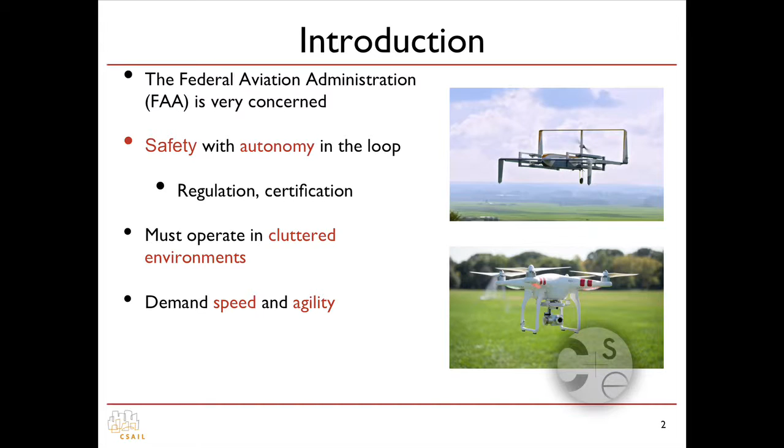So there are a number of factors that exacerbate this challenge. So the first is that we expect these systems to operate in very cluttered environments. So for example, in urban environments or even close to human beings. We also demand speed and agility on behalf of these machines. So there's no point having a drone delivery program if it takes more than a couple of hours for the system to get to your doorstep. And finally, these systems must also be able to deal with unexpected events in the environment. So things like wind gusts, for example, or unexpected obstacles that show up in front of the robot.

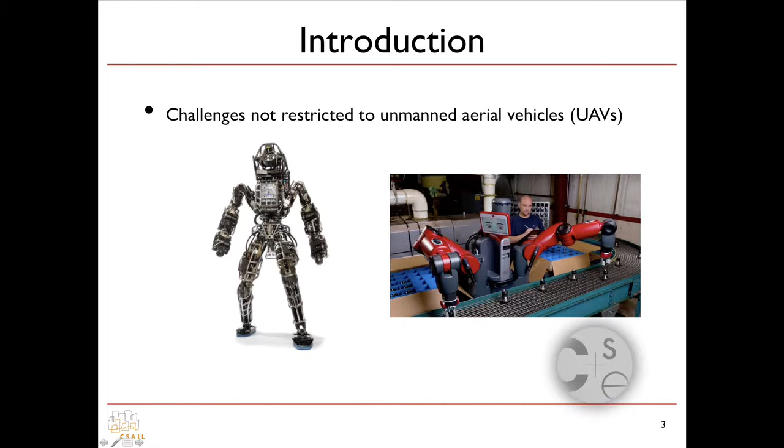So it's worth pointing out that these challenges are not restricted just to UAVs. So we face many of the same challenges in a whole range of other robotic applications. So for example, humanoid robots doing search and rescue missions, or factory robots working close to human beings. So these systems must also be able to operate safely while being fast and agile and responding to unexpected events in their environment. So from a theoretical perspective, these applications pose a number of fundamental challenges.

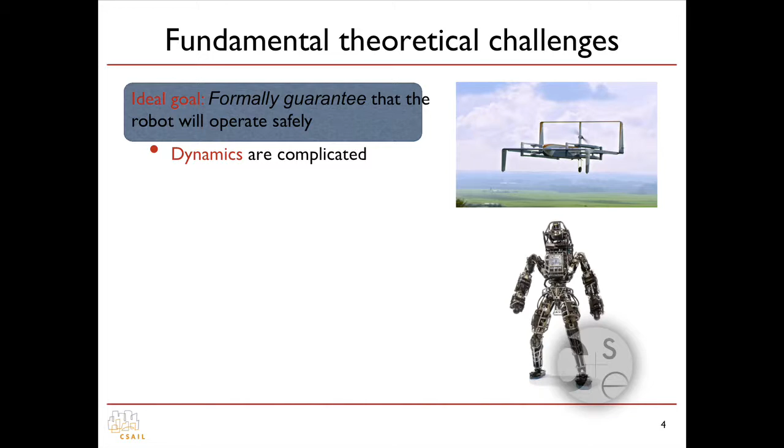So what we'd ideally like to be able to do is formally guarantee safety, so formally guarantee that the robot will operate safely. So for a UAV, this essentially means not crashing into obstacles and not falling out of the sky. But there are a number of technical factors that make this goal extremely challenging. So the first is that the dynamics of these systems can be extremely complicated. So for example, we might have high-dimensional state spaces that we might need to reason about, and also potentially nonlinear effects, such as aerodynamic effects.

There's also significant uncertainty in the dynamics. So for example, things like wind gusts or an uncertain payload that the robot might be carrying. And finally, there's also significant uncertainty in the geometry of the environment. So typically for these applications, we don't know where obstacles will be and what they'll look like until the robot actually starts operating in that environment.

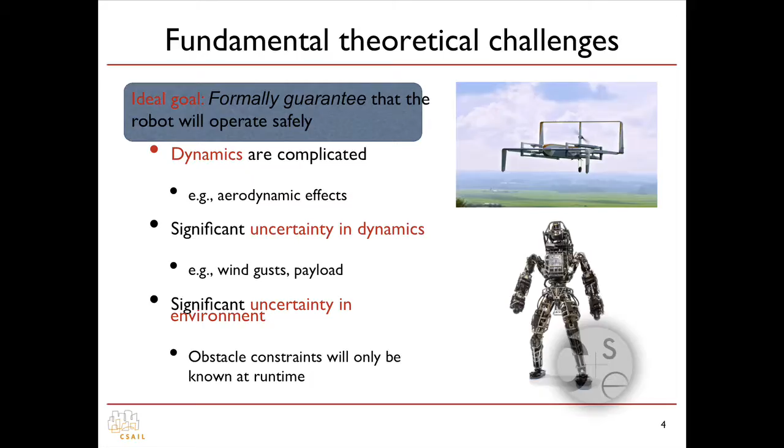So what I'll present today, I believe, is a partial solution to this ideal goal of guaranteeing safe operation of the robot, despite having these technical challenges. So just to keep the discussion relatively constrained, for most of the talk, I'll focus on the problem of high-speed UAV flight through really cluttered environments.

But I want to point out that the approach that I'll present is significantly more general and not tied to the specifics of UAV applications. So I'll present algorithms for designing feedback controllers that come with associated guarantees on their safety. And I'll then discuss how we can take these feedback controllers and certificates of safety and use them for safe, real-time planning in environments that the robot hasn't seen before.

And along the way, I'll present a number of hardware experiments on a small fixed-wing airplane flying at high speed through very cluttered environments. OK, so here's the general problem we're trying to tackle. What we want to do is be able to guarantee that the UAV will fly through some environment without collisions, given no prior map of where the obstacles in the environment are.

So I'll make a number of assumptions. First, I'll assume that we have a reasonably accurate model of the dynamics of the system. It doesn't have to be perfect, but I'll assume that you have a model of this uncertainty in some parametric form, and that this uncertainty has a bounded effect on the system. And finally, I'll assume that the robot is equipped with a number of sensors which report where obstacles in the environment are, but in some finite horizon in front of the robot.

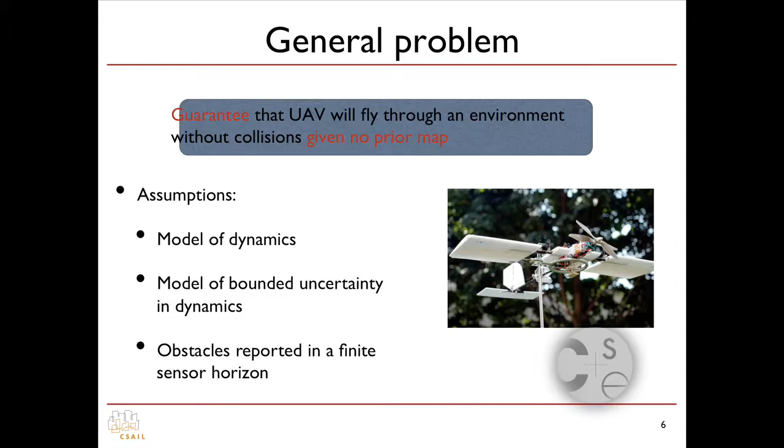OK, so instead of discussing the solution to this completely general problem, for most of the talk today, I'll focus on what I consider to be the most important subproblem, which is how do you plan a single maneuver such that the UAV is guaranteed to be collision-free when that maneuver is executed.

So here's the picture I want you to have in your head. Suppose the robot is flying along, and suddenly its sensors report a number of obstacles in front of the robot. The question is, how do you plan a single maneuver such that you can guarantee that when that maneuver is executed, the robot will remain collision-free?

So let me give you some intuition for some of the technical challenges involved with this task. First, there's a combinatorial decision that needs to be made. Should the robot go left around the obstacles? Should it go in between the obstacles? So there's a discrete number of possibilities that it needs to choose from.

We also need to take into account likely tracking error. For instance, the current state of the robot might not be perfectly aligned with the plan that the robot made. And more significantly, we also need to take into account the effect of uncertainty or disturbances on the system. For example, there might be a large wind gust that blows the airplane off its planned trajectory and makes it crash into an obstacle.

So what we really need to do is reason about the funnel of possible outcomes that the robot might be driven to, depending on what value the disturbance takes. Different maneuvers also have different susceptibility to disturbances. For example, it might be a lot easier to fly straight. In particular, the set of possible outcomes that the robot might be driven to might be a lot narrower, as opposed to doing a really aggressive turn to the right, where you're more exposed to a large wind gust that can blow you into some large set of possible outcomes.

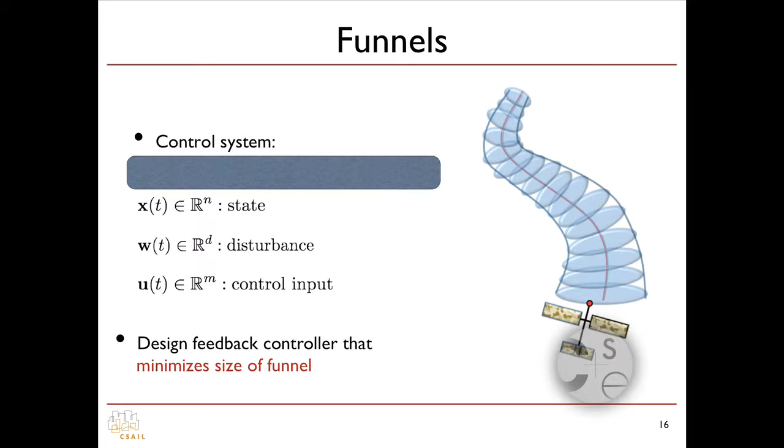Because if the funnel doesn't intersect the obstacles and the robot is guaranteed to remain within the funnel, then the robot won't collide with any of the obstacles. OK, so that's the high-level approach. Let me now dig into some of the details of the approach. So in the offline phase, what we'd ideally like to be able to do is, given a control system of this form, we'd like to design a feedback controller that minimizes the size of the funnel going forwards in time. So I'll fix the set of initial conditions, and I'll try to design a feedback controller that minimizes the effect that the disturbances have on the system.

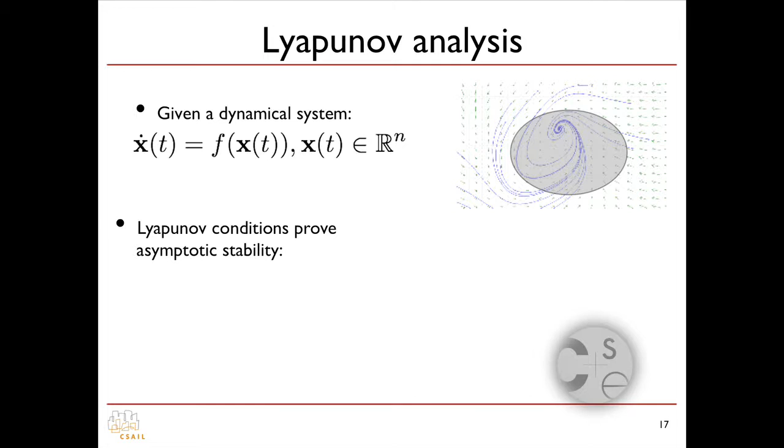So one way to prove this is to find a Lyapunov function. So a function V for which the gray set that I've drawn here is a sub-level set of this function. So sub-level set just means all the states x for which the value of the function is less than or equal to rho. So rho is 100 in this picture that I've drawn here. And let's say we can further show that the value of this function is positive definite on the set, and the time derivative is negative definite.

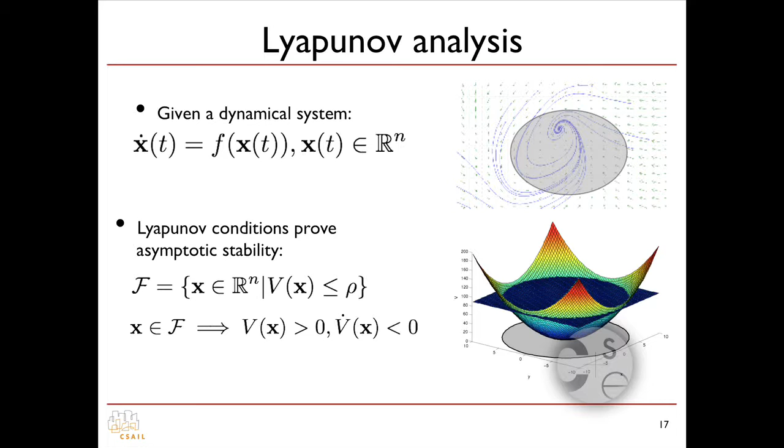So in other words, along trajectories of your system, you're going downhill on this function. So intuitively, it should be clear that if your function looks sort of like a bowl and you're going downhill on this function, then you'll asymptotically approach the origin. So you can use a similar kind of idea for computing funnels.

So we'll represent the funnel as a sub-level set of this time-varying function v. So in this case, what we're interested in is not asymptotic stability. What we want to show is invariance. So in other words, we want to show that if the state of the robot starts off in this initial condition set, so the inlet of the funnel, then when you execute this maneuver, you'll remain within this time-varying sub-level set.

So you can write down a slightly different Lyapunov condition in this case, which says that when v equals rho, so in other words, when you're on the boundary of the funnel, v dot is less than rho dot. So essentially, the vector field is pointing inwards when you're on the boundary of the funnel. So if you start off in the funnel, you never leave it.

So in the kinds of applications we're interested in, it's really important to take into account the effect of disturbances or uncertainty on the system. So it turns out you can do a similar kind of analysis for cases where you have bounded uncertainty. So what we'd like to show is this invariance condition for bounded uncertainty. So we want to show that when you start off in this initial condition set and you execute this maneuver, no matter what the disturbance is in some set of disturbances that you care about, you'll still remain within this funnel.

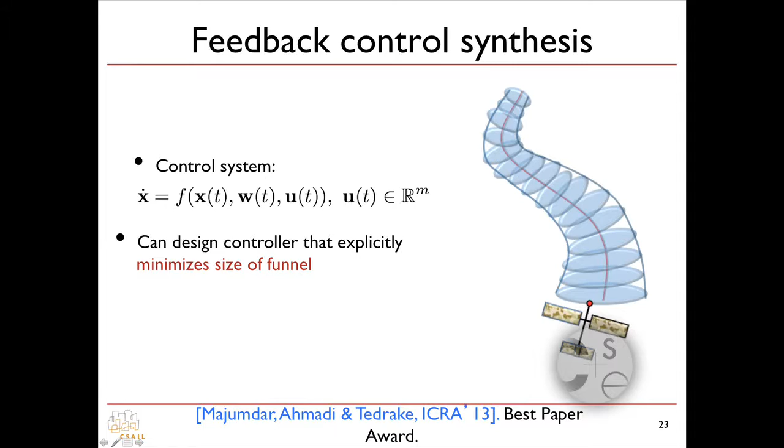Yes, go ahead. Is there a sense in which the sufficiency is somehow right? Like in CS theory, right? These SOS things are, you know, the hope is if you can't do it there, there are other methods that will work. So yeah, so the question is essentially, is there a gap between sums of squares and non-negative polynomials, right? Or what other techniques you might use, like the sense in which this is the best you could hope for.

Okay. So I guess there's some complexity theoretic reasons maybe for believing that sums of squares is the most efficient way you can do this kind of problem, for checking non-negativity. But they're still in the conjectural stage, right? So I think they depend on the unique games conjecture and things like that. But there's no real unconditional proofs showing that sums of squares is the best in any sense. But there's still a gap between sums of squares and non-negative polynomials, especially as the degree of your polynomials grows and also as the number of variables grows, in some sense.

But are these control problems like general non-negative polynomial problems, or are they more structured? Oh, I see. So I'll just repeat the question to make sure people can hear. The question is, are these control problems very structured sums of squares problems, or are they completely unstructured? So yes, they do have quite a bit of structure. Especially if you have symmetry or sparsity in your dynamics, oftentimes you can exploit the symmetry or sparsity to make your sums of squares programs smaller and cheaper to compute.

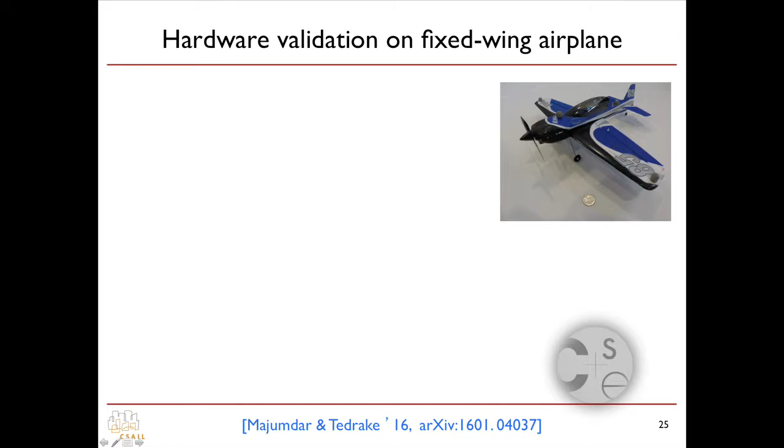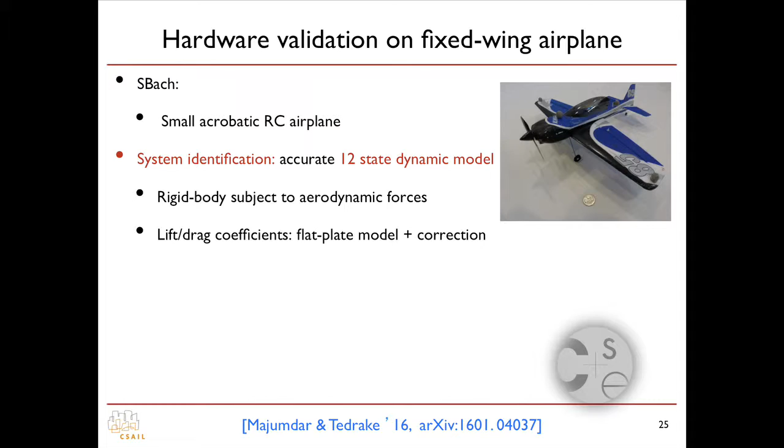Okay, so I've described these computational techniques for computing funnels, but probably one question that everyone in the audience has is, do these computational guarantees really mean anything on a real challenging hardware system? So the hardware system I'll present experiments on will be the small fixed-wing RC airplane. I spent a lot of time doing system identification to get an accurate 12-state dynamic model for the system. I'm basically treating the system as a rigid body subject to aerodynamic forces, where the lift and drag coefficients come from a flat plate model plus a small correction term.

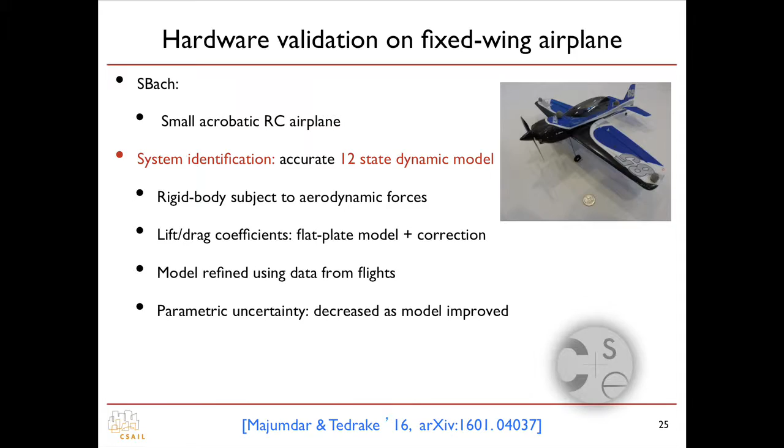So I refined this parametric model using lots of data from flights. I ran the airplane with different open loop control inputs and did simulation error minimization to refine the parameters in my model. And I was also taking into account some parametric uncertainty in the model, which I decreased as I collected more data and as the model improved. It's worth pointing out that I'm hiding essentially months worth of work here in this one bullet point. It took a lot of time to do this system identification, but I won't say too much about that here unless people ask me at the end.

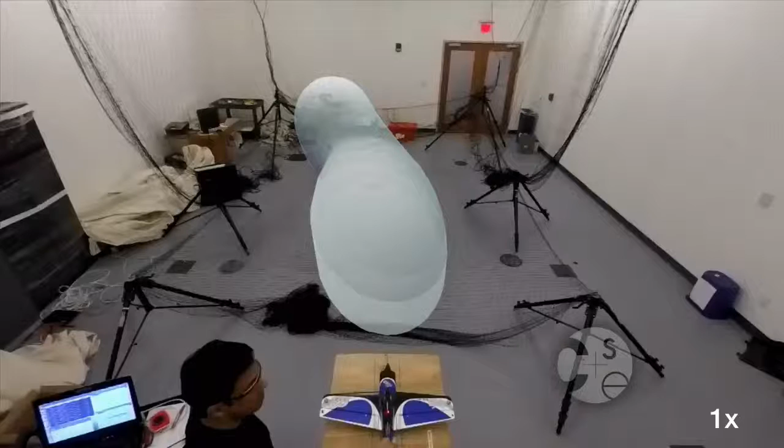So the experiments I'll present will be in a motion capture arena, and all the computation is on an off-board platform. So here's a visualization of what the funnels look like. It took about 30 minutes on a standard desktop computer to compute this funnel. And again, even though these visualizations will be in 3 dimensions, the funnel really lives in the full 12-dimensional state space of the system. I'm just projecting the funnels down onto 3 dimensions in order to visualize it. So here's a video of what it looks like when the airplane flies through the funnel.

So I hope you enjoy these visualizations, by the way. It took me about 2 weeks to make.

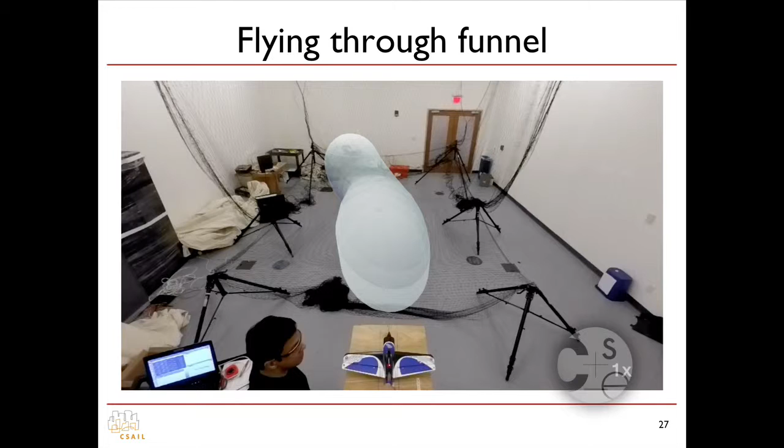Okay, so from these videos, it looks like the airplane is remaining within the funnel as you would expect from sums of squares programming. And I did a number of thorough experiments to actually validate this. So in particular, I did 30 flights from different initial conditions, starting off within the inlet of the funnel. And all 30 of these trajectories remained within the full 12-dimensional funnel.

So as you can see, all 30 of these trajectories start off in the inlet and then remain within the funnel as you would expect and hope from sums of squares programming. So these computational guarantees that we were computing on our computer actually translate onto the real hardware system, which is quite nice. Okay, so let me quickly summarize what I've described so far.

Yes, there's a question at the top there. Sorry, did you have any disturbances in these experiments? So there were no external disturbances, so there was no wind or anything like that. But I was taking into account the parametric uncertainty in the model itself that came from the fact that I had a finite amount of data that I was using to fit my model.

Okay, so I've described these computational techniques, specifically sums of squares programming, to compute funnels, which allows us to reason about the nonlinear dynamics of the system and also uncertainty in the dynamics. So I presented these hardware experiments on a small fixed-wing airplane. And one of the things I was slightly surprised by was that sums of squares programming was actually able to handle this kind of 12-dimensional system.

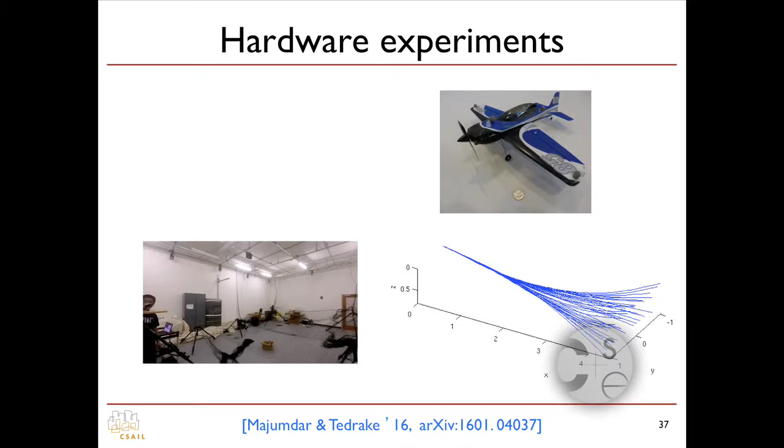Okay, so in the hardware experiments that I'm about to present, I had 40 different funnels computed along these trajectories that you see here. So in these experiments, the planner is not informed where obstacles in the environment are until the airplane clears the launcher. So as soon as the airplane clears the launcher, I tell it, here's a number of obstacles in front of you, and then it goes and does the search and reacts in real time. So here's a video with real obstacles.

No, I'm assuming that that's not uncertain.

Yeah. So the obstacles spell out MIT, by the way, in case you didn't notice. I was bored one day.

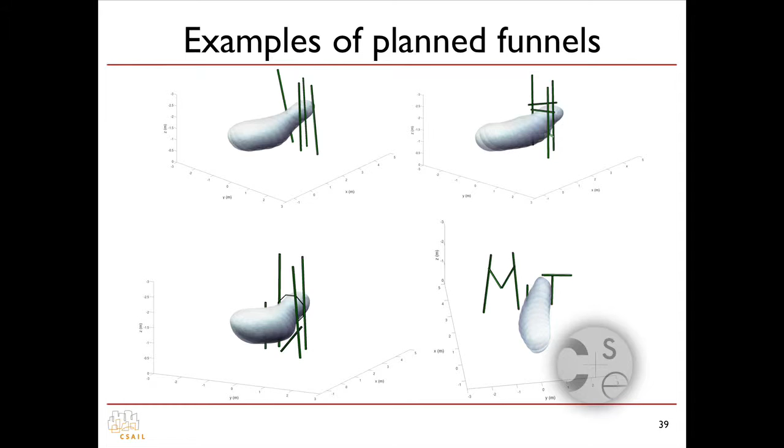Okay, so here are some examples of what the funnels look like for these different environments. So as you can see, they're all collision-free. And one thing that's really worth pointing out is the importance of exploiting these invariances or symmetries in the dynamics. So in particular with the environment with the hoop in it, you would have to get extremely lucky to find a funnel that fits exactly in between the hoop. But if you exploit invariances or symmetries, you can just shift the funnel out of collision and execute the shifted funnel instead. So being able to exploit these symmetries gives you a lot of expressivity in terms of your funnel library.

Yes, go ahead. I'm kind of trying to understand how difficult the problem is in terms of, like, you really want to push this technique to when it actually fails and see how sharp those boundaries are. Yeah. Because maybe it's easy and we didn't have to worry about safety here at all. Do you have a sense in which this thing is actually breaking down at the boundaries of where it says it should break down, or are we well within the safety regime?

Okay, so I'm going to paraphrase again, but the question is essentially how tight these bounds are and whether we're pushing the system to the limit. So I've done some experiments where I start the airplane just a little bit outside the funnel, and in this case I see that it kind of remains along the boundary and it doesn't really go very quickly to the trajectory. So I think the funnels and these bounds that we're computing are pretty tight, and I feel like we're pushing the system to its limit, or close to its limit anyways.

Yeah. Okay, so one question I haven't really addressed yet, and maybe this will also partially answer your question, is what kinds of environments can we guarantee to be able to find a collision-free funnel in? So let me make some really simple observations. So the first is that the obstacles cannot be too close to the airplane. In this case, the airplane just won't have enough time to react.

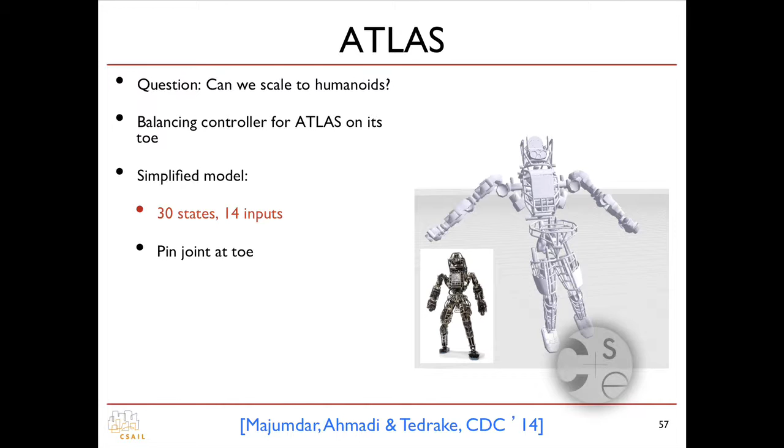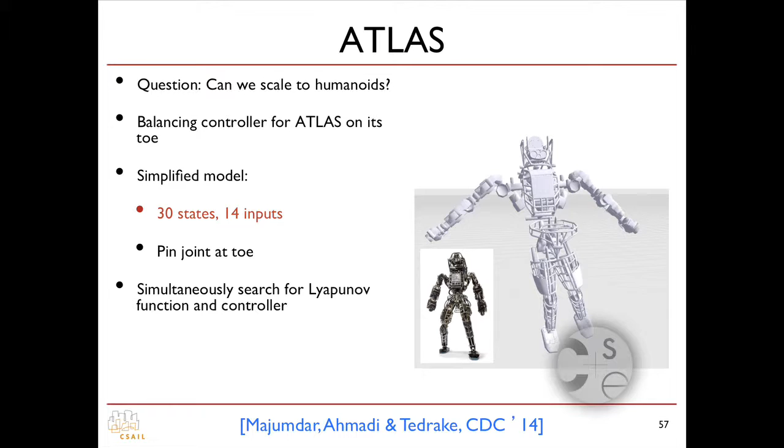But one simplification that I'm making is that there's a pin joint at the interface between the foot and the ground. So more specifically, what I'm doing here is simultaneously searching for a Lyapunov function and a feedback controller in order to maximize the size of the region of attraction for the controller. So essentially the set of initial conditions from which the controller is able to stabilize the system. And it's worth pointing out that this problem is way beyond what sums of squares programming can handle.

So here's a video of what the controller looks like. So this controller was designed using SDSOS programming, which is the second-order cone programming version. So what I'm doing here is randomly sampling different initial conditions and simulating the feedback controller from these different initial conditions. So you can imagine that the robot is being perturbed at each of these trials. And as you can see, it's able to stabilize a pretty wide range of different initial conditions.

Okay, so we propose these scalable alternatives to sums of squares programming, which are based on linear and second-order cone programming instead of semi-definite programming. So this has allowed us to scale to problems well beyond what SOS programming can handle. So in this talk, I described this 30-dimensional and 14 control input model of the humanoid robot.

But in other work, we've applied this technique to many other problems in different domains. So other problems in control, problems in machine learning, finance, optimization. And in each of these cases, we've seen some really significant gains in terms of the scalability without too much of a loss in terms of the optimal value or the conservatism we get with this approach.

And I think there's some really exciting potential for real-time applications of this approach. So for higher dimensional systems, we get this gain in terms of scalability. But I think for lower dimensional systems, there's an opportunity to do real-time computation with these approaches. So maybe real-time computations of feedback controllers or funnels even. And I think that's a really exciting potential direction.